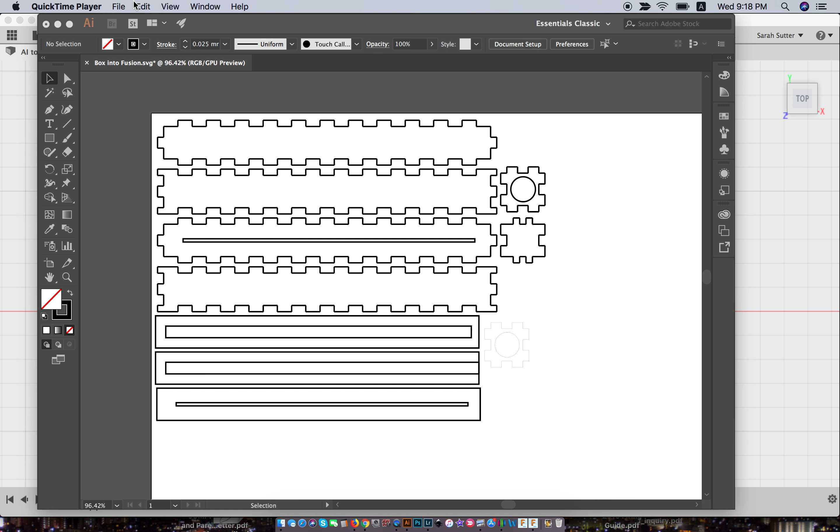You take your Illustrator file, and you're going to File, Save As. You'll start with it as an Illustrator file, then you're going to change it to an SVG file. So, SVG file. Great.

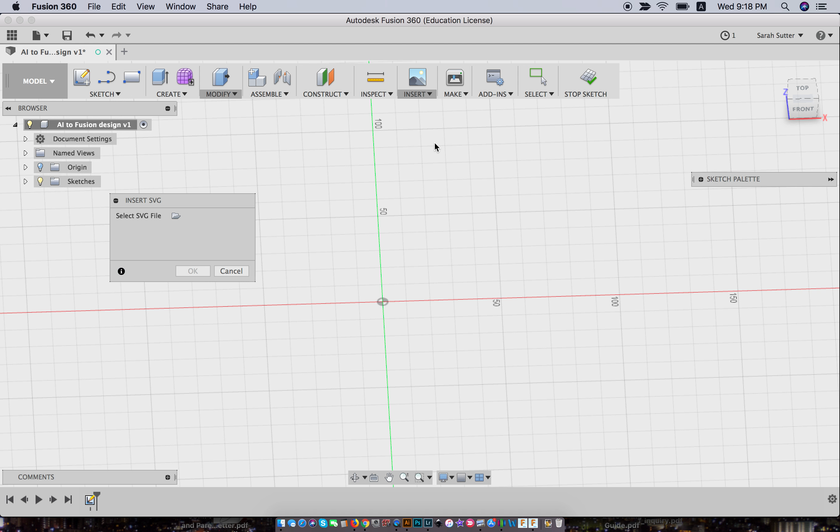Then you can go into Fusion. I'm going to just move this guy a little bit, and I'm going to insert an SVG file, lo and behold. And I would like to insert this one. Great. Okay, I want to put it flat on this surface. And I should just be able to click.

Okay, I have layers. If you have layers, you're in trouble. You can't have your layers overlapping. So this is going to be a bit of a problem, but you'll get the gist of it.

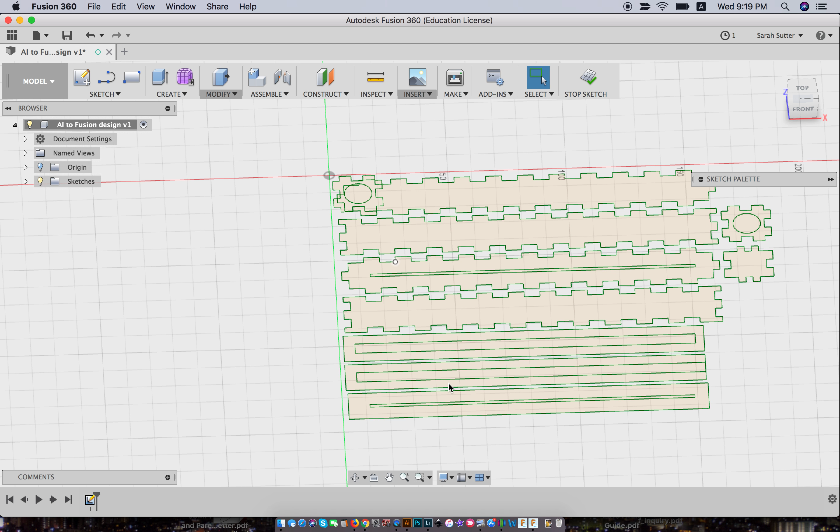Now I want to turn these things into three-dimensional pieces. So all I have to do is click on the piece, click on all of the pieces you want, hold the Shift key down, go to the next one. That's the part I'd like to make thicker. I want to use this one. Those are my two end caps, not the dot.

Come on. Oh, for heaven's sakes. There we go, this one.

And if you really wanted to do the design right, you would go in and do the pieces that you stacked up to put the light in accurately. Those are all the pieces I need. I do need this piece. I just have messed it up here. It's kind of a pain.

Because right now it's not going to let me do it with all of the... anyway, I'm going to make a mess. But you get the idea.

What happens is after you pull this, the parts that have not been selected disappear. So the middle of my, like these holes, are going to go away. If there was something that I hadn't selected, like the other parts of this end piece, watch what happens when I press pull.

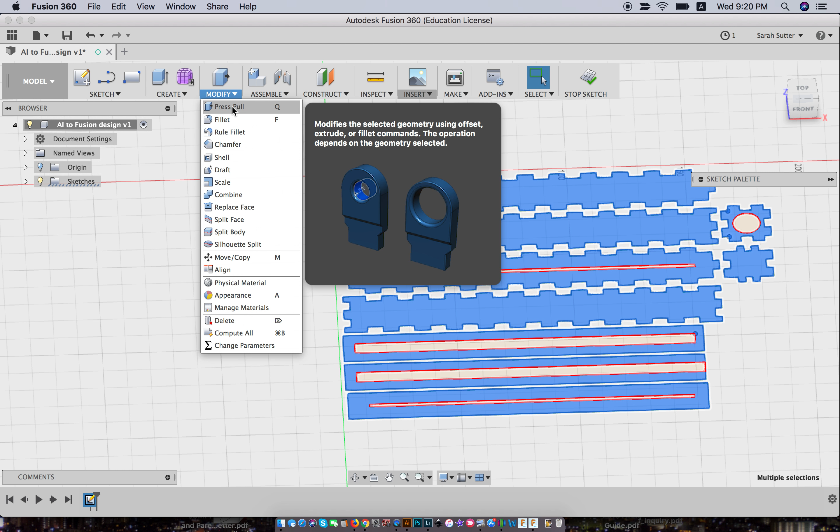So now I do Modify, Press Pull, and I can grab - it'll grab, oops, I'll grab you too, come on. 4 millimeters. Okay, so because I clicked off of these guys, not brilliant.

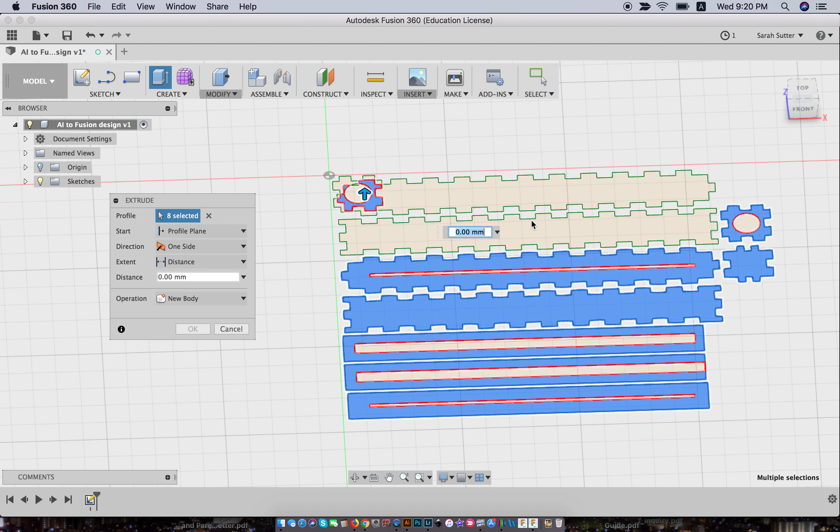Let's see if I can go back to, here we go. Shift, shift, shift, blah blah blah blah. Again, make sure - if you see the dot, that's not what you want, you want the whole face. Oops. See, not genius for everybody.

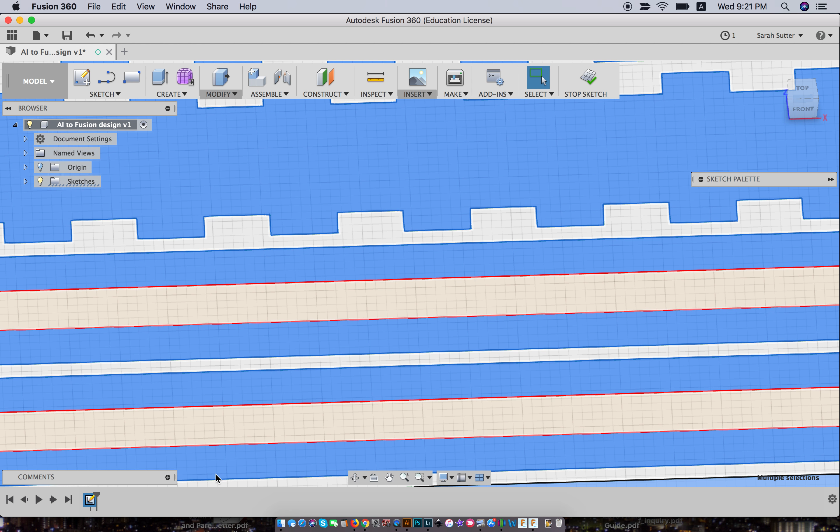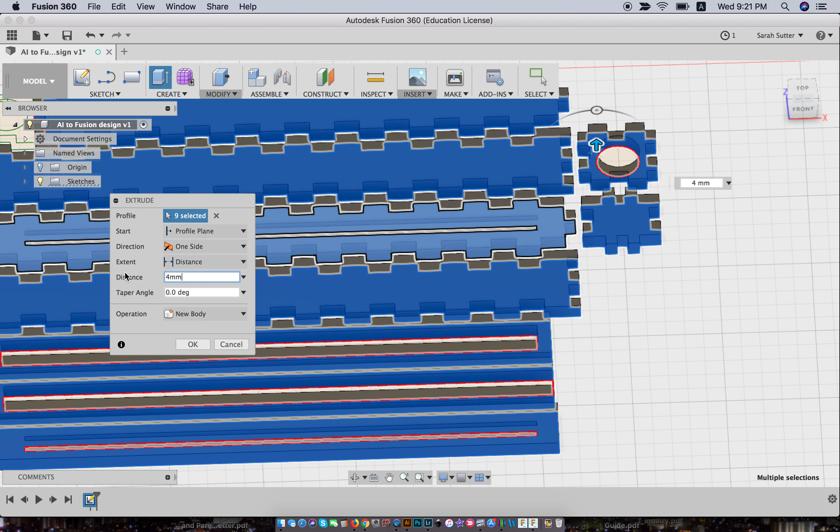Here we go. Shift key, this one, and that one. Okay, I'm going to hit Q for Press Pull. I have 9 pieces selected. Don't click on anything, type in how thick you want them. This is the 4 millimeter press board that we have that we've been cutting out, okay? So we hit OK.

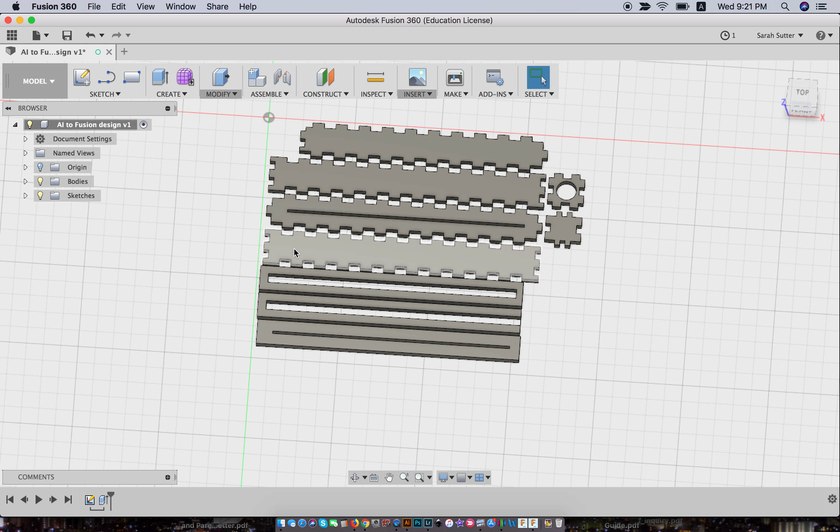Thinks for a second because there were 9 of them. And now if we look down on the top of these things, those are the sketches. And if we shift to the side, there are all the pieces for my box. So ostensibly, if we have it all lined up right, this one lost its end piece, but we should be able to stick this up here.

We actually want to - remember the align thing that we did to get things flat on a surface? We want to align this to that. Oh, but I want it to - nope. Okay, let me undo. This one to this one, this one to that one. Are you gonna work? Come on.

Modify, align, that guy to that guy. And then this one, we should be able to move.

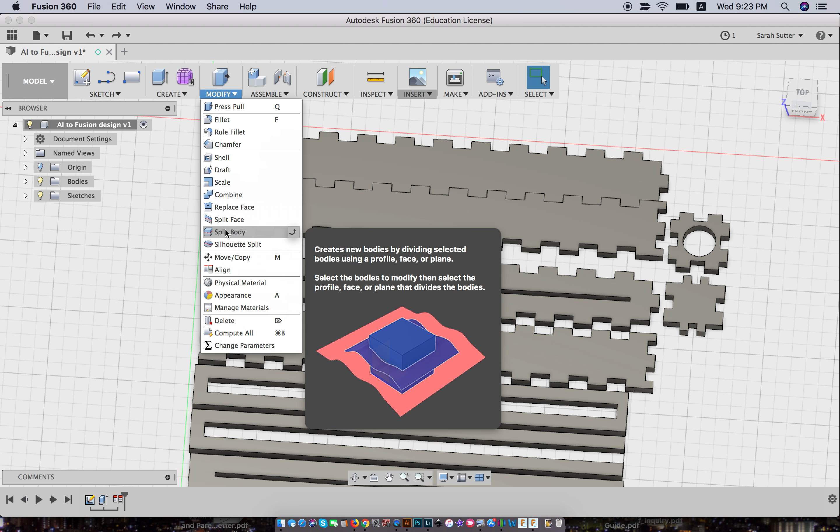Move this guy, rotating on the x-axis. How do we do, 90? Nope, 270. Wrong direction. Move this body, rotate this one, or we can go minus 90. Oops. Minus 90? Minus 90! Okay, so you could rotate first.

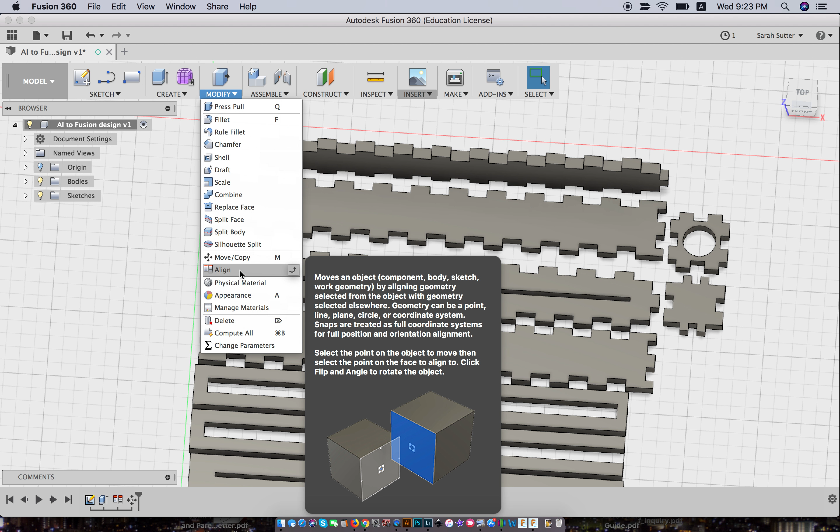Gotcha. Then you can go do your align so that this guy is going to align to - now that he's upright - he's going to align to the one at the backside. Right, that guy. Ho-ho! Putting the box together.

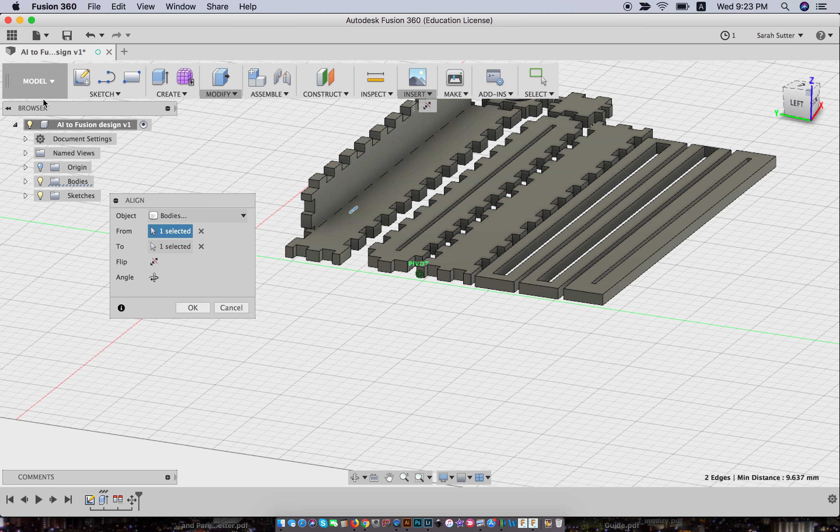If you want to, while it's apart, you can always do the exploded view too, so that's kind of easy. Don't forget to render it, you'll be all set.

Now, that's part one - that's getting the box pieces into this pretty easily. Now, if you are super pressed for time, although that was pretty fast, you could just make a box and stick a piece of acrylic in it in your 360 design. The key to this is then making the light look like acrylic and glow with your engraved design on it as a decal.

There is already one Fusion screencast on how to do emissives. I'll make another quick one about the acrylic thing as well and put that up. But this is the one to get this done really quickly.